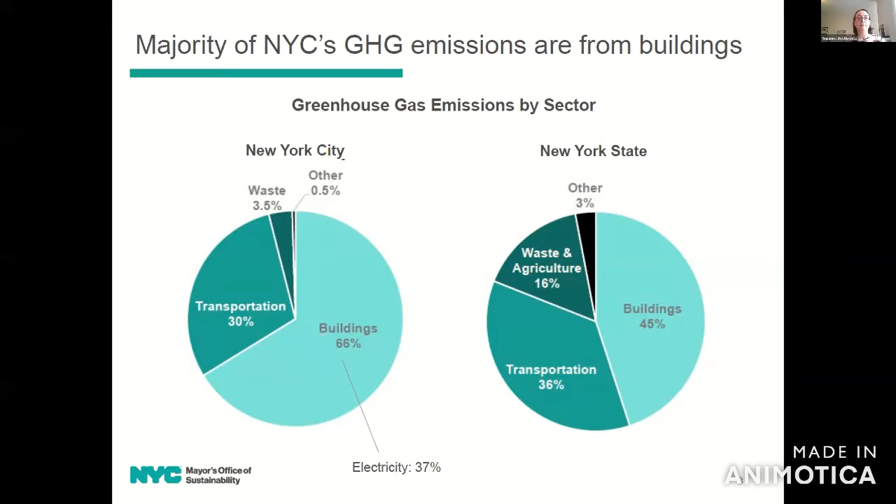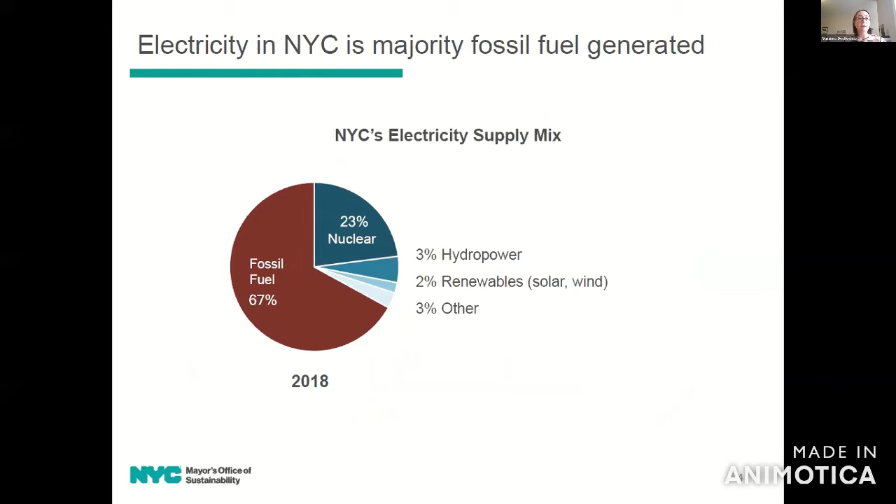So I focus a lot on our energy supply, our bulk supply, and how do we get that to be carbon neutral, which is a very high goal. You can see here in 2018, the electricity we consumed in New York City was majority fossil fuel, followed by nuclear and then some hydro and renewables.

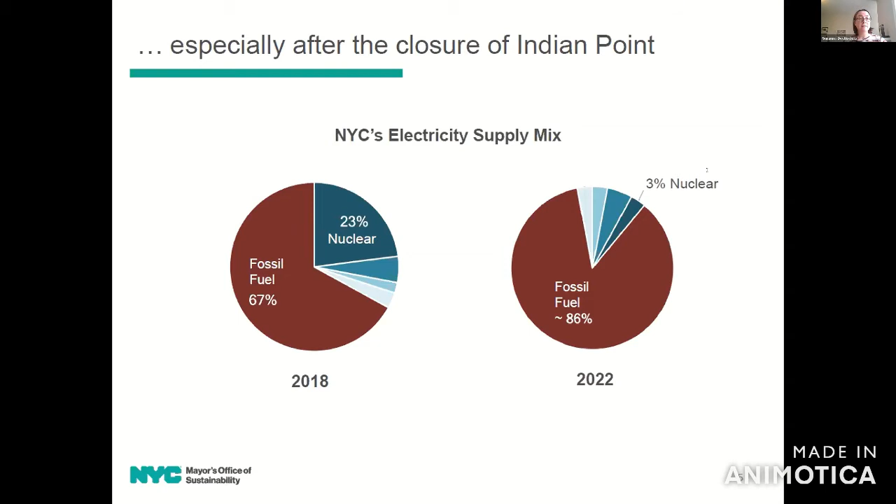However, our main nuclear power plant will be closing in 2022. And so you can see in 2022 that our fossil fuel mix is now up to about 86%. Some models show it as high as 90. So really, this is a challenging issue specifically for New York City. And I'll talk a little bit about some of our solutions there.

So across these three pillars, we look at how can we utilize the space in New York City to increase distributed resources, mainly in the city, that's solar and batteries. And then what can we do to incentivize energy efficiency in the private sector, on top of what we're doing in the public sector. And I won't talk too much about this today in the interest of time, but also how do we make these changes while increasing our resiliency to the impacts of climate change.

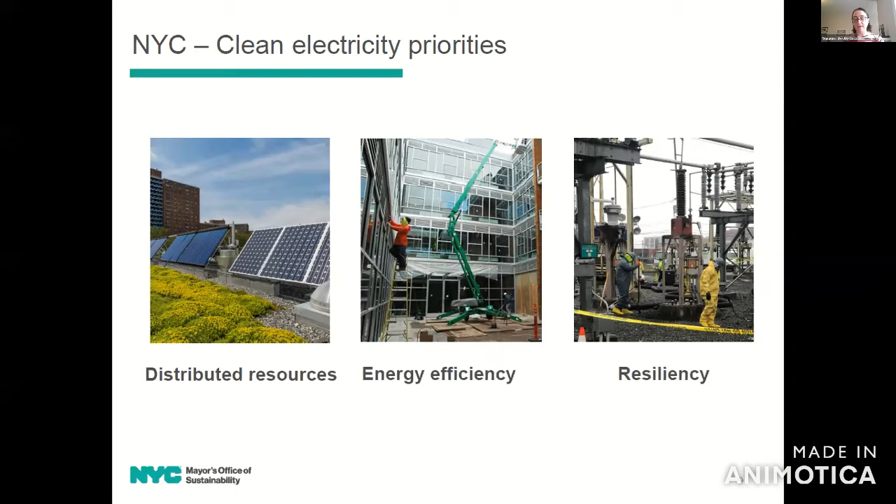So the first thing I'll talk about is energy efficiency. The city passed a landmark set of green bills in 2019 called the New York City Climate Mobilization Act. One tenet of that bill was Local Law 97. This one, for folks tracking what's happening in the US, was a really big deal.

We basically set a cap for large buildings on their greenhouse gas emissions, and then we will just decrease it over time. The first cap is in 2024, followed by a cap in 2030, and then subsequently on a 5-year cycle, those caps will decrease. So this is really one of the main ways that you're gonna see that decrease in the building sector in terms of our emissions.

We followed that in the same package of bills with a way to finance that is better for the building stock and better for owners. So we established PACE financing through Local Law 96. And this allows low-cost, clean energy financing that stays with the building rather than the owner. So it comes through essentially a tax function. And so that allows ownership of buildings to be passed on while still having financing that allows for clean energy projects.

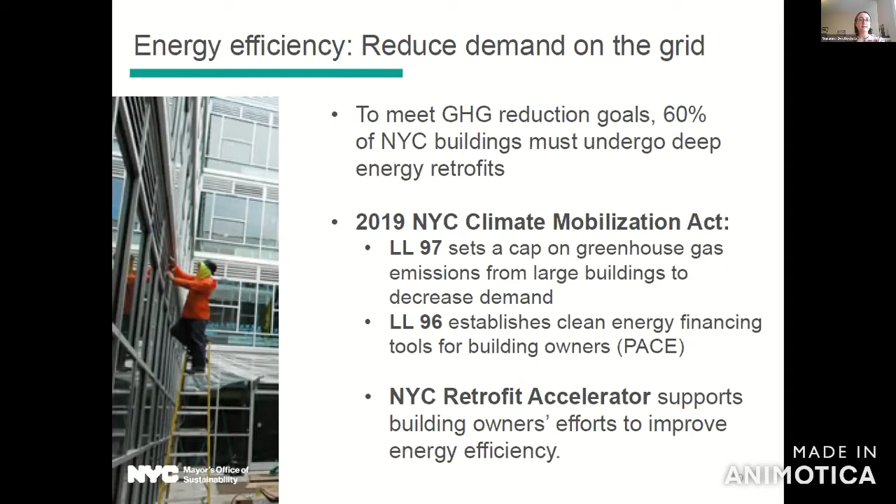And then the last piece of this is what we call the New York City Retrofit Accelerator. This program has been going for a number of years. And it's a service that the city provides to building owners to basically connect them to technical services and incentives that exist to try to do energy efficiency in their buildings.

Also passed in the Mobilization Act was Local Law 92/94. This requires solar or a green roof or both on all new construction in New York City, regardless of the building size. So again, trying to aggressively move towards some of these targets you can see. We're trying to reach 1,000 megawatts of solar by 2030. We have a little over 200 megawatts now. So we think we're well on our way, and this bill will really help push towards those targets.

We need this solar on buildings. We mainly see that as a way of decreasing demand from the buildings, not necessarily as part of our bulk supply strategies, but really to ensure that those buildings are using less of the grid power.

The other piece is ensuring that we have a lot of battery storage. Some modeling across the state right now has close to 10 gigawatts of storage installed in New York City. It's a lot of battery storage to offset some of what is coming with offshore wind here on the East Coast. So we're really trying to ensure that the public and the development community understands how to permit storage in such a dense urban environment.

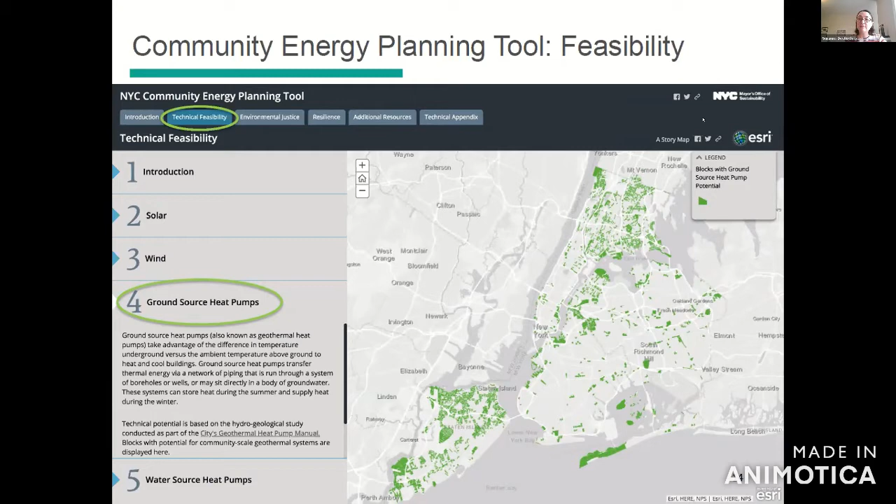Another tool that we have for the development community is our community energy planning online mapping tool. I'm just going to flip to the next slide here. This gives you, from the development community, a perspective on where we think certain technologies will work in the 5 boroughs. So what we're looking at here is the ground source heat pump feasibility on a block basis. And then we have all of these other categories like energy cost burden. So this is how much of folks' paycheck is going to their energy bill.

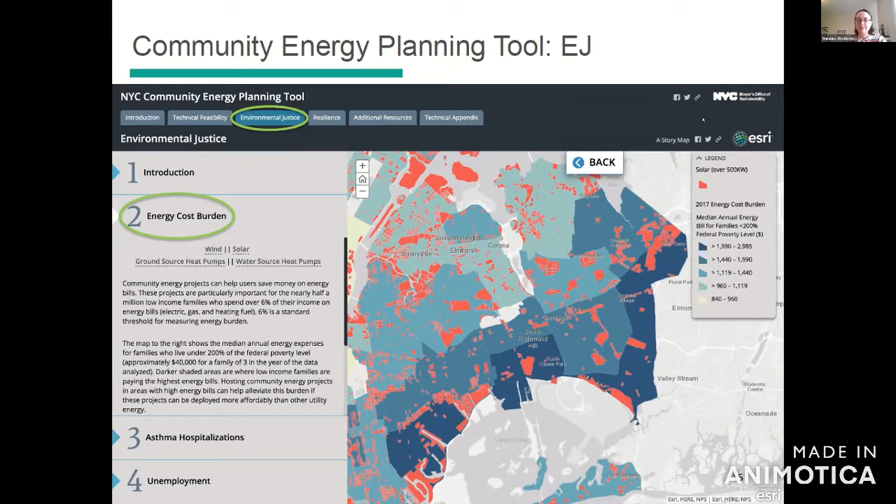And what you see here in the darker blue means those folks are paying well beyond our target, and their energy costs are really eating up a lot of their expendable income. So we overlay that with solar as a way to show the development community that these would be good places for people to really take advantage of low-cost solar to help decrease their bills. So this is a public tool, and if you just Google New York City Community Energy Planning Tool, it'll pop right up. Feel free to ask questions about that later.

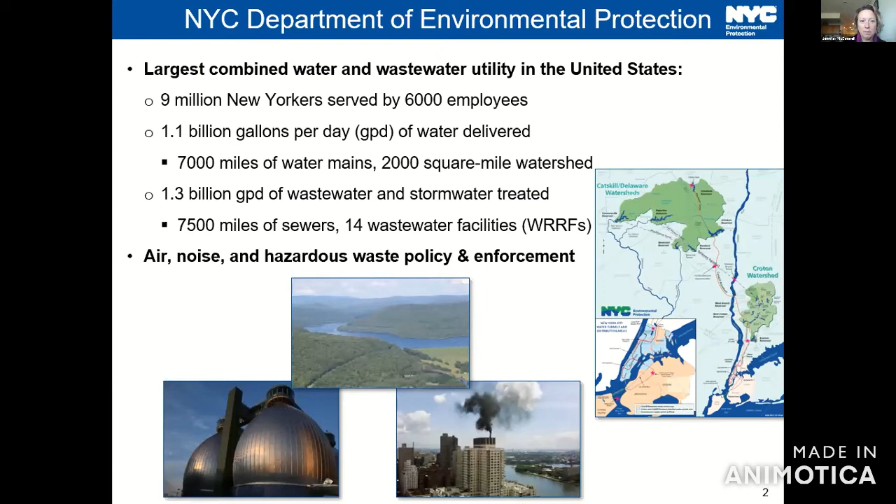I'm part of the Office of Energy and Resource Recovery Programs. This slide provides an overview of the work that our office does. We're a small group, but we have our hands in a number of things that have been discussed today. I personally focus on the resource recovery portion, biosolids, and the intersection of organics and energy production.

We have these targets that many have talked about today, and we are examining how we can apply those to our work at DEP and what projects we will need to undertake in order to meet these targets. Our agency is actually the 2nd largest emitter of greenhouse gas emissions in the city and the 3rd largest energy consumer. So we're a big part of the citywide goals. We realize that, but we also see that we're a large source of opportunity. In fact, some of the clean energy that Suzanne was mentioning upstate is from hydroelectric power installed in our watershed system where the city's clean water comes from.

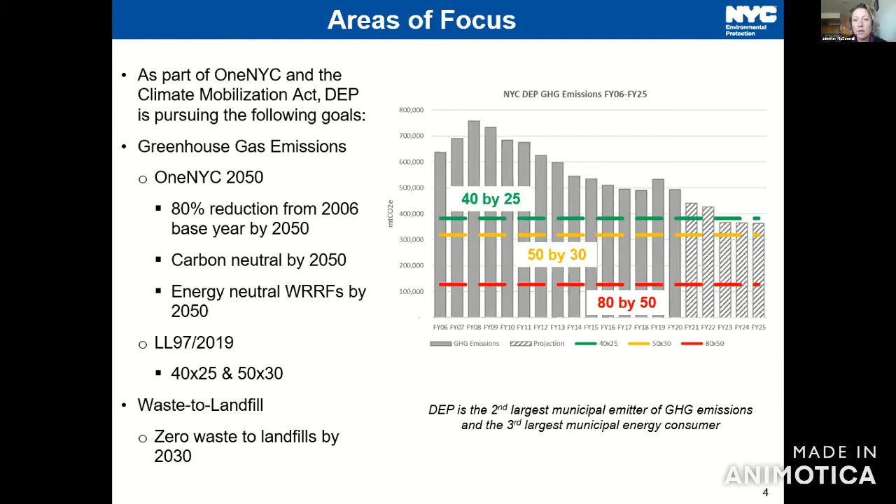From a greenhouse gas reduction perspective, we have a 4-pronged strategy that overlaps with many of the concepts and technologies that have been talked about today. We're looking at conservation and efficiency on the demand side, finding ways on the supply side to make that supply greener, on-site energy generation using anaerobic digester gas is one of the largest parts of our strategy. Also looking at fuel switching and electrification.

We do more traditional renewables as well. We have solar at a couple of our facilities and are looking to install more solar right now. We've taken a look at geothermal as well as sewer thermal on our effluent. And so this is an area, if there are folks who have technologies in this space, we'd be interested in

learning more about them. And as mentioned, I'm focused on biosolids and the potential that that source has from a carbon perspective to be offsetting from our emissions when we manage to beneficially reuse those solids and get them back

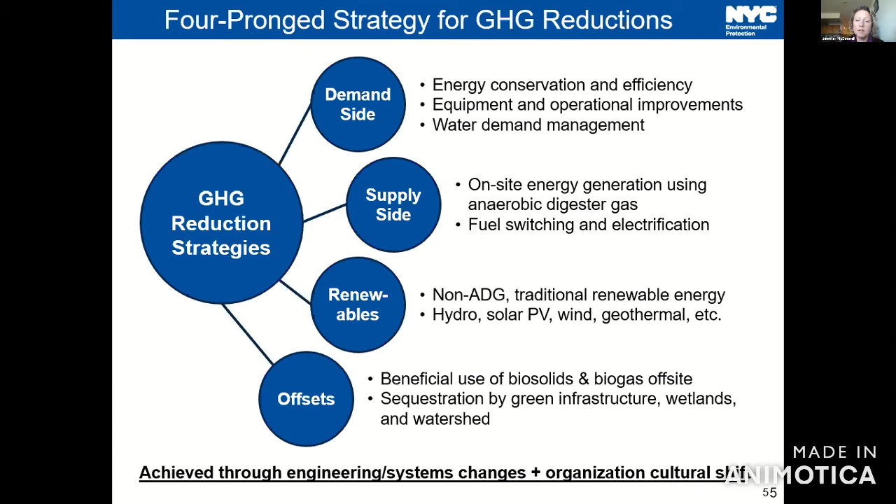to land. So the vision for DEP is to become a sort of center in the circular economy by taking in discarded resources from the entire city and recovering various valuable elements from them, whether it's electricity, production of clean water, biosolids, as I mentioned, or even next generation products such as elemental phosphorus. Those are all things that we're looking at as part of our planning.

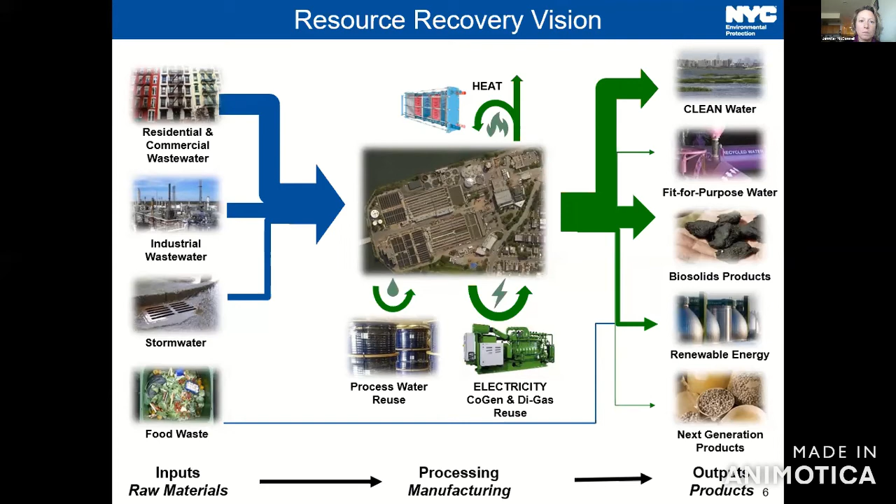I'll speak a little bit more about that food waste project because it's an area where we are hoping to see additional likely private investment or application of technology, particularly on this middle step that I've circled. And that is in order for us to co-digest organic feedstocks at our wastewater plants, they need to be pre-processed and cleaned up. So contamination needs to be removed and they need to be made into a slurry so that we can feed them in with our liquid waste stream.

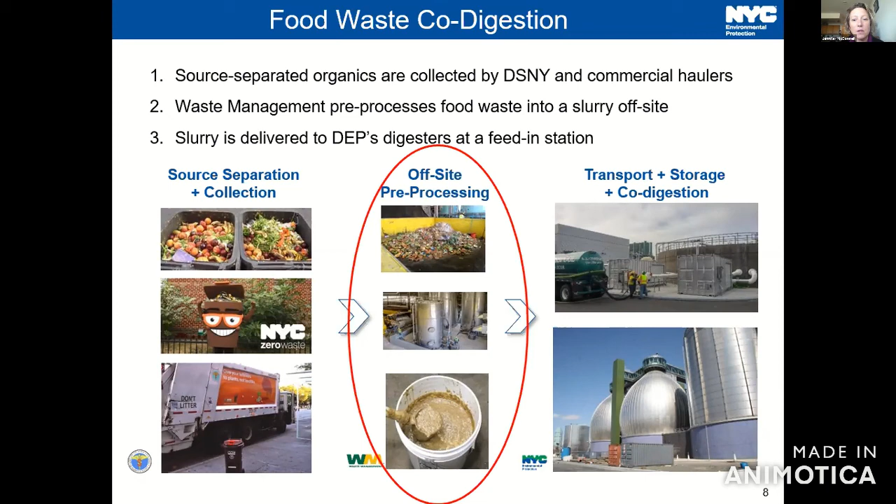Biosolids remains kind of my favorite thing, so I had to put in some specific information about this. And I did note in the prior presentation in the chat, there was a large discussion about biochar and making biochar out of biosolids. That's something that I'm watching very closely.

There are 4 projects in the sort of tri-state area geography looking to install pyrolysis or gasification for the treatment of biosolids in particular. So there isn't any local production of biochar from biosolids yet, but there are a number of companies innovating in this space and trying to get it off the ground because it does create that renewable syngas energy as well as result in a large volume reduction.

It's very interesting for the city because we make a tremendous amount of biosolids, about 1,400 wet tons a day or 50 to 60 truckloads. So this is something that we're taking a very close look at as part of our energy and carbon neutrality plan for the agency. And one of the goals that hasn't been talked about as much today, but is included in the citywide goals is a zero waste goal. And we've adapted that to our biosolids. So we're hoping that by 2030, we no longer have any biosolids going to landfills.

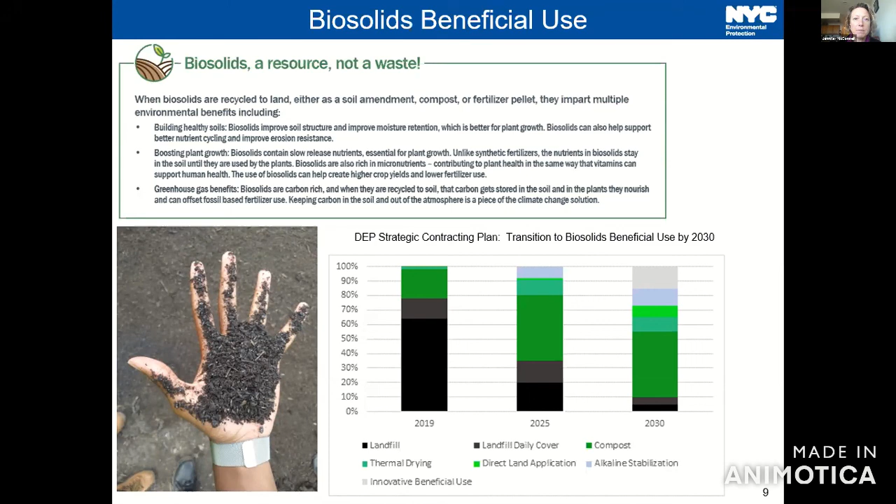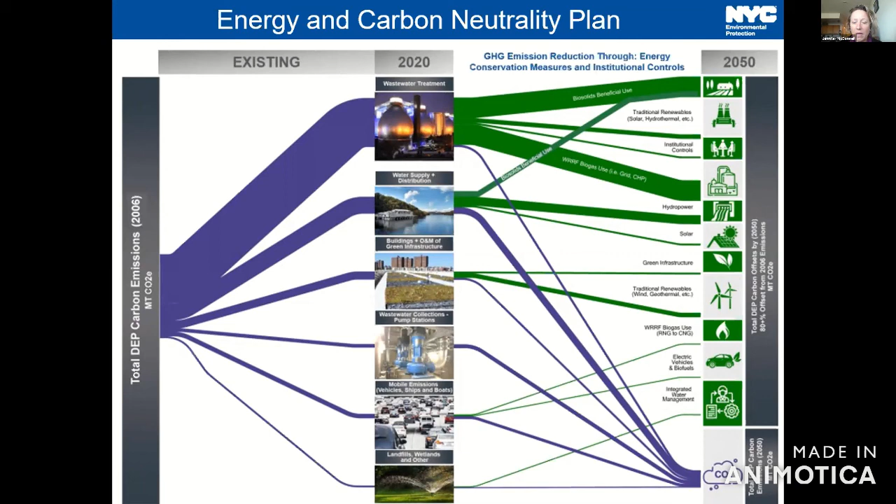So to sum up, we are working on an agency energy and carbon neutrality plan, so a roadmap of how we're going to achieve those goals. We're 1 year into this 3-year planning project, and that's going to take us out to 2050. This isn't our final product, but it's kind of a look forward as what we think might transition us to that place where we're meeting those greenhouse gas and energy neutrality goals by diversifying, sequestering, and implementing new technologies.